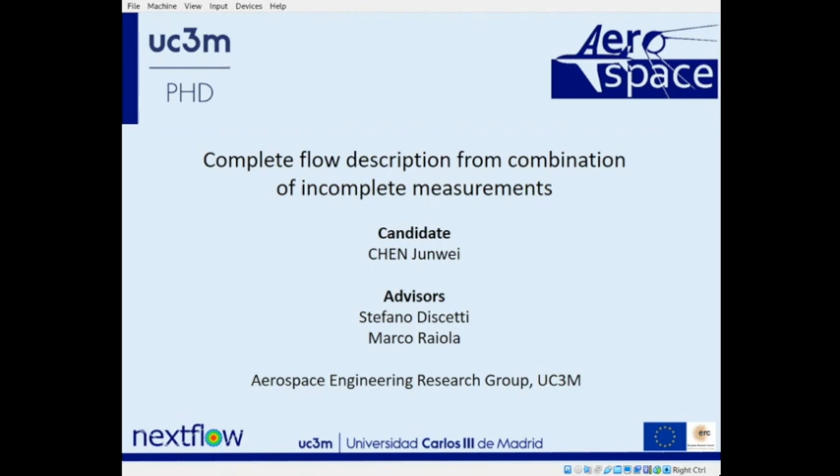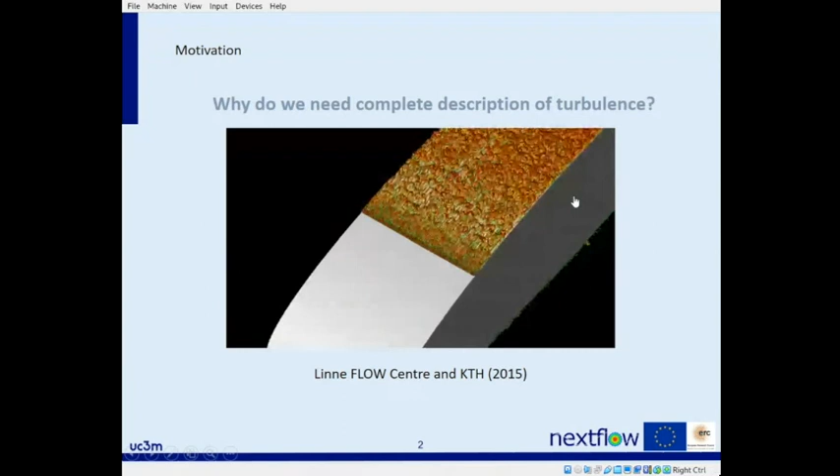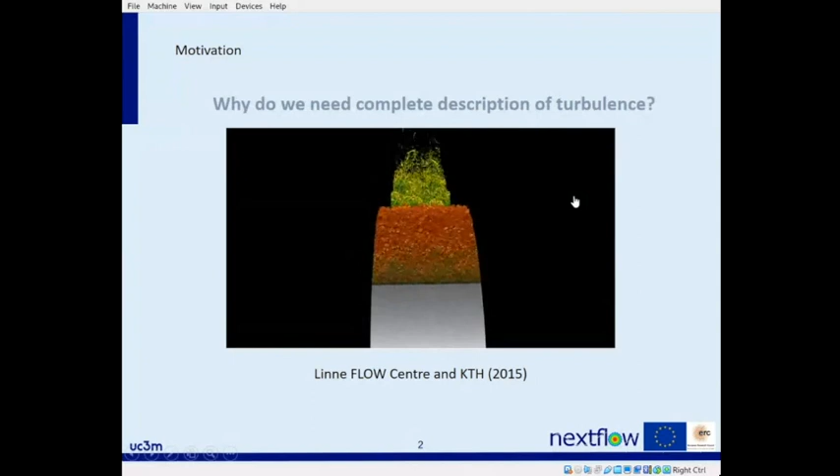Hello, my topic is about data-driven flow measurement, in order to find a complete flow description from the combination of incomplete measurements. Here is a simulation about a wing. You can see there are many 3-dimensional flow structures on the wing. So if we use a point measurement or 2-dimensional measurement on that, we cannot find the full information of the flow field.

Here is a picture about an Asian Indian story. Some people close their eyes to touch an elephant. They may touch its nose and think the elephant is a rope, or they may touch its ear and think the elephant is a fan, but it's not exactly what the elephant is.

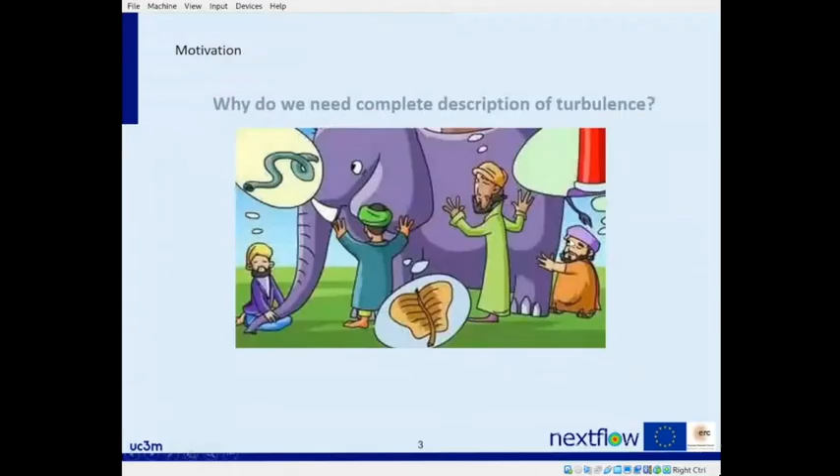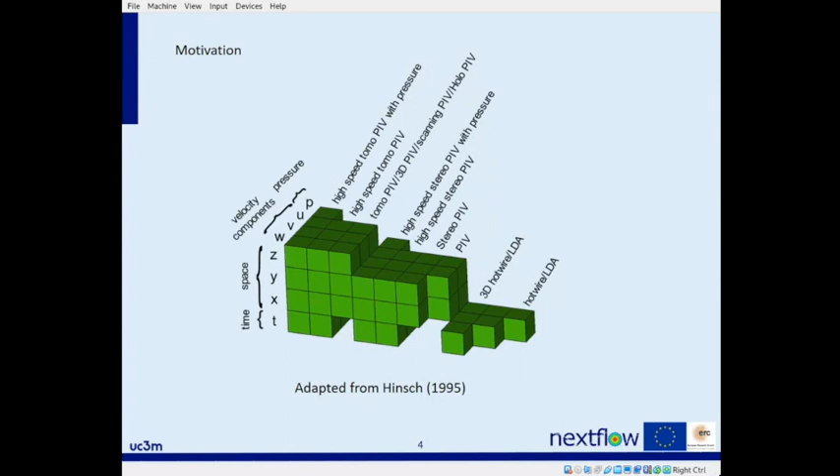And here is a famous picture about the development of flow measurement. We used to have a single point measurement, but there was not much information. With the development of technology, we have more and more dimensions in the measurement and more and more components. With high-speed Tomo PIV to measure the 3-dimensional velocity, we can calculate the pressure from the Navier-Stokes equation. So we have the four-dimensional and 4-component complete description of the flow.

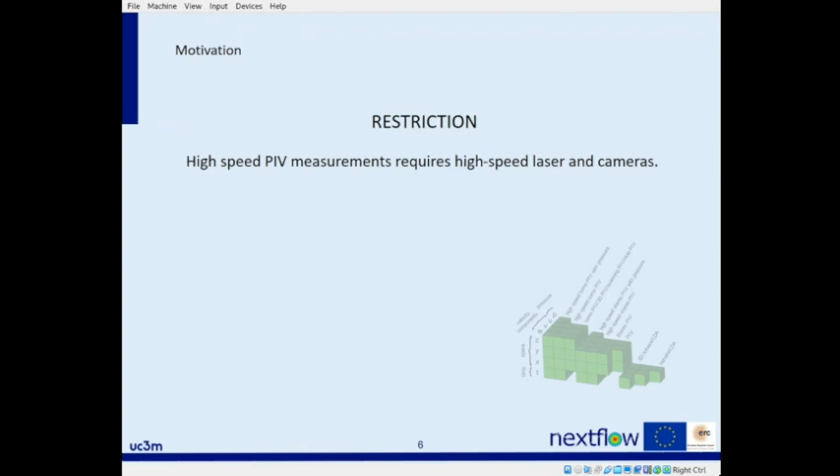But the restriction of high-speed measurement is that we need high-speed lasers and cameras, and there are 2 kinds of laser frequently used in PIV. One is Nd:YAG, another is Nd:YLF. The high-speed laser Nd:YLF has a higher sample rate, but it is expensive, and the average power of Nd:YLF is lower, and they need high-speed cameras, but such cameras are less sensitive, and even with the laser and cameras at the highest speed, they can only measure low speed flows. So there are many shortcomings of direct high-speed PIV.

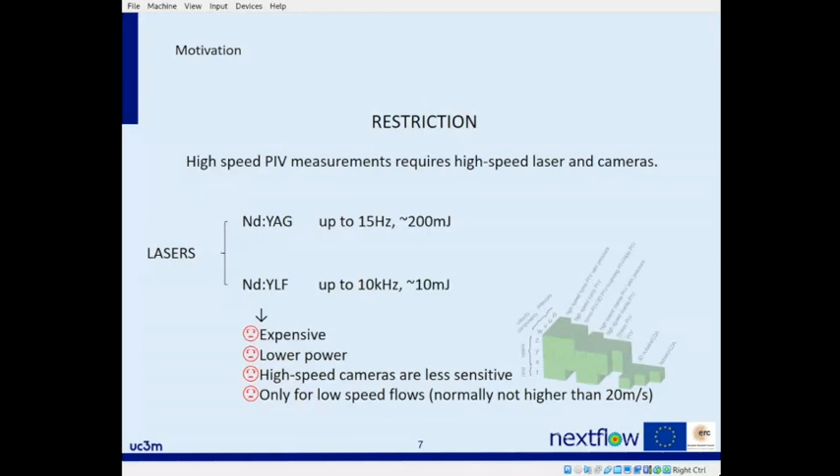For the measurement of pressure, we can use the exact 3D velocity and the Navier-Stokes equation to find the gradient of pressure and integrate it into the real pressure. For lower speed PIV, the time-resolved term of the Navier-Stokes equation is not easy to know. So there are some ways to find it. One is using the continuity equation, so that the time derivative will be removed. But in this method, the time derivative of velocity still needs to be known on the boundary. So we need full boundary conditions.

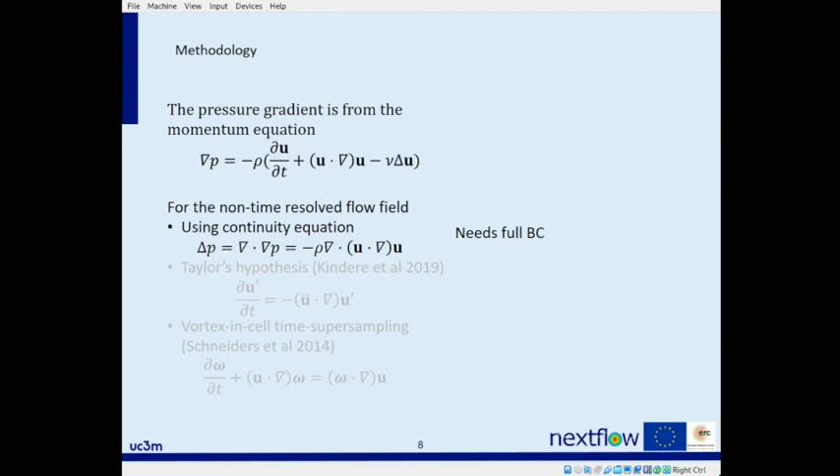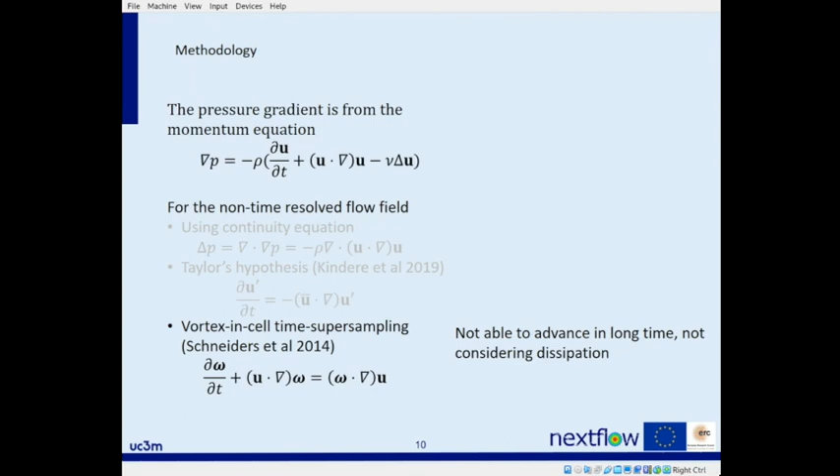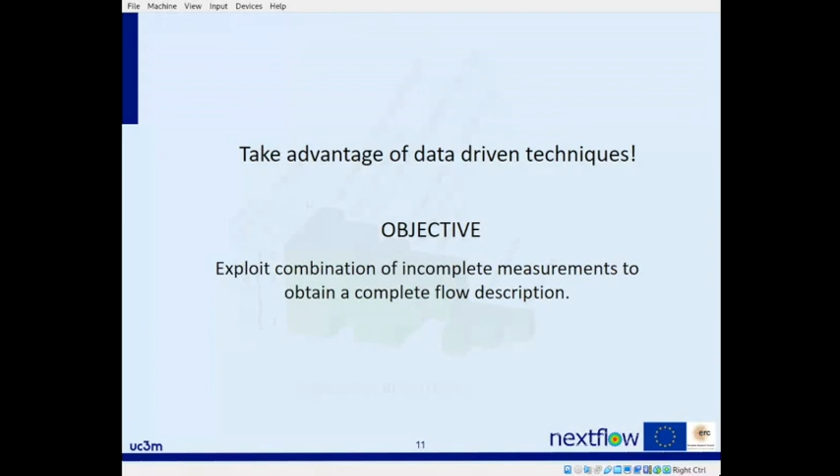Another way is to make use of Taylor's hypothesis, but it cannot endure for a long time. Another way is to use the vortex-in-cell method. However, it is not endurable in time, and it does not consider dissipation. So we want to take advantage of data-driven techniques by exploiting a combination of incomplete measurements to obtain a complete flow description. There are several ways to achieve it, such as EPOD, KNN, and CNN.

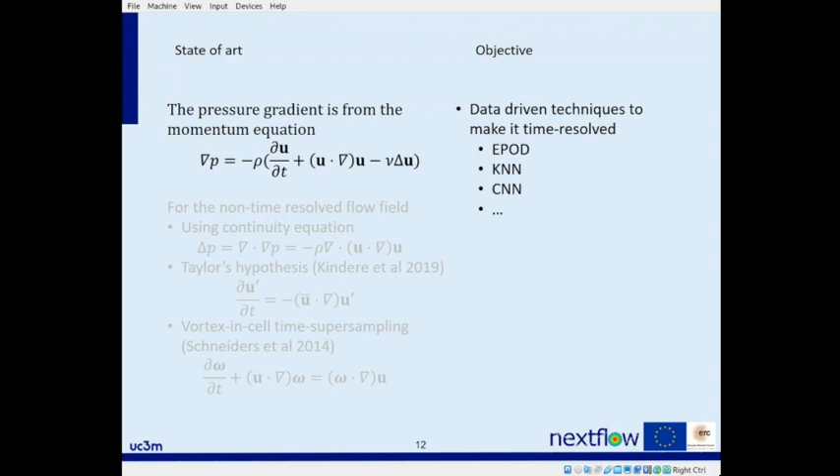Here is the first case we use to validate our method. Here are three fixed cylinders in the flow, and we measure the wake. There are 5 probes here, and the velocity on the probes is also recorded, and we can use the high sample rate probe data and some snapshots to reconstruct the time-resolved flow field, and use the Navier-Stokes equation to calculate the pressure.

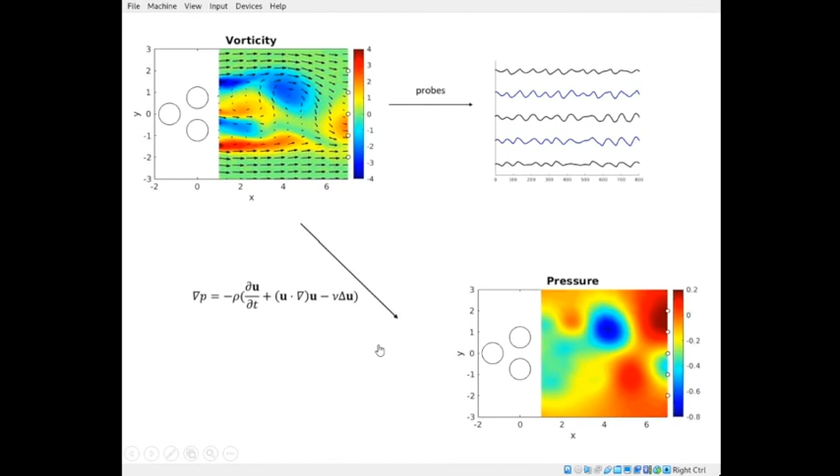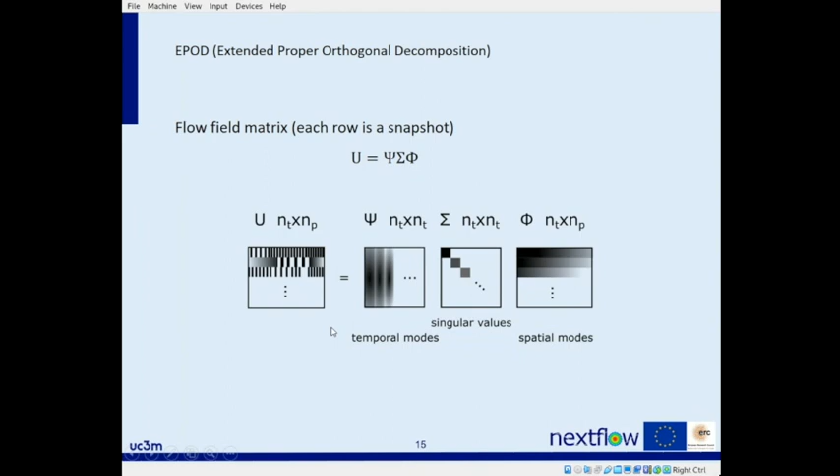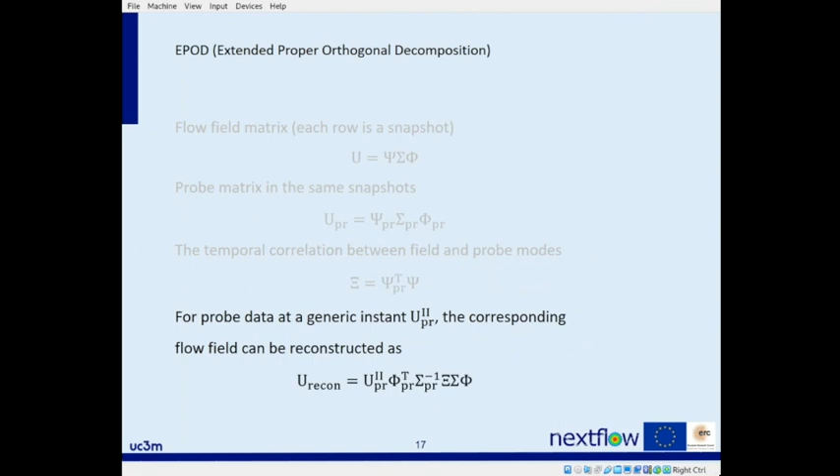Here is the method of EPOD. We use POD, proper orthogonal decomposition, to decompose the flow field into temporal modes, singular values, and spatial modes. For the probe data, we also do it, and we can find the correlation of temporal modes between the fields and probe data. Then we have other time-resolved probe data, so that we can reconstruct a time-resolved flow field.

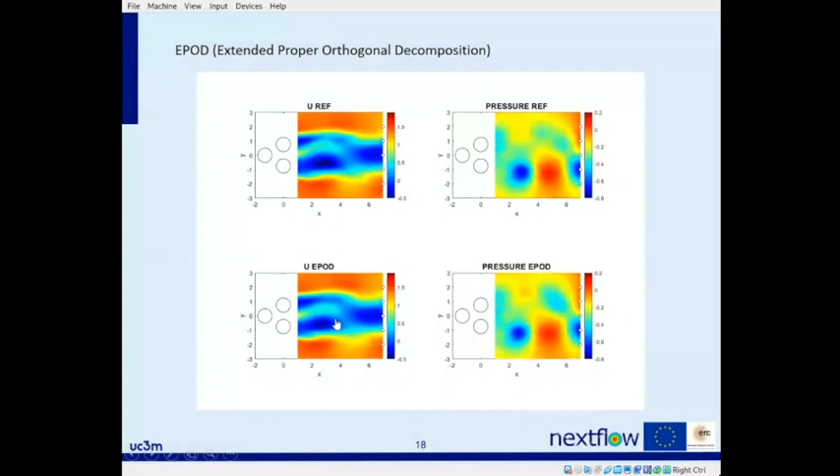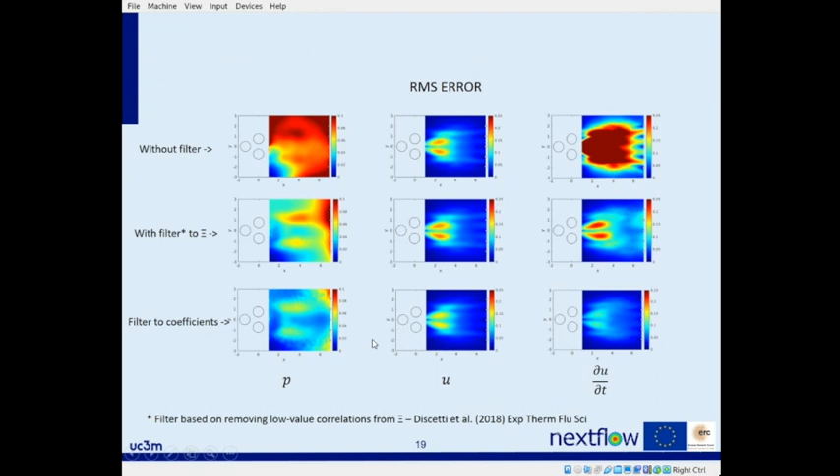And here are some results. The first row is the pressure and the velocity from the simulation, and the second row is the pressure and the velocity we reconstruct using EPOD, and with the proper filter in EPOD, we can get better results. As you can see, without the filter in EPOD, the time derivative of the velocity is not good, so this method gets poor pressure, but with this filter we just found recently, we can get very good results.

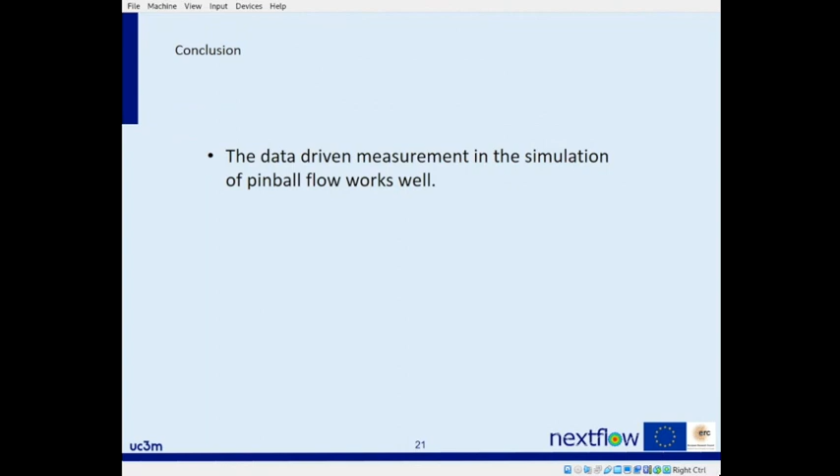And here is the conclusion. The data-driven measurement in the simulation of pinball flow works well, and with the suitable filter, the accuracy of EPOD improved, and we can get very accurate pressure estimation from the new method.

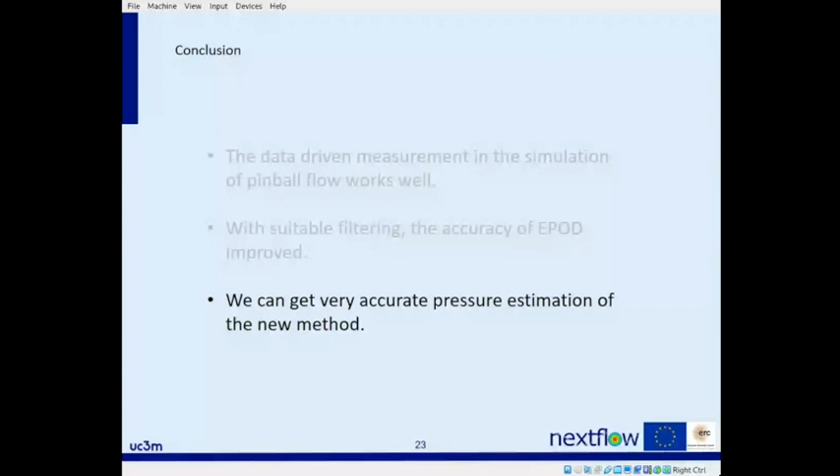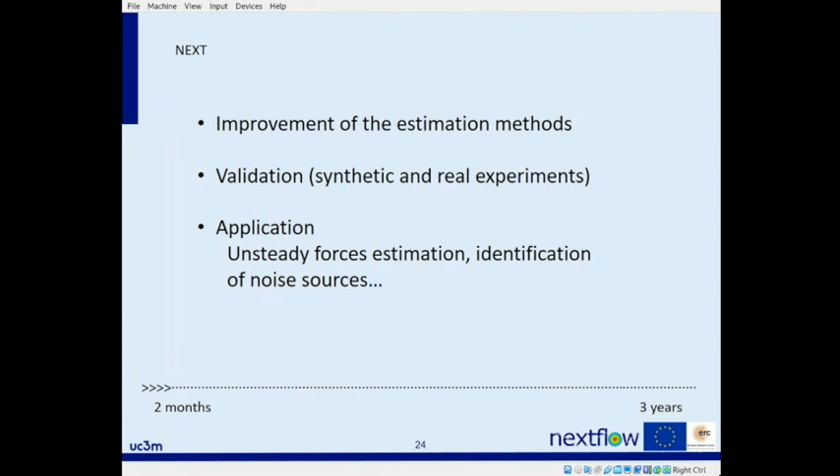What we are doing next is to improve the method and validate it again and again, and then we can find some applications of this method, such as estimating unsteady forces or identifying the noise source. I just started the PhD 2 months ago, so there is a lot of work to do later. And thanks to the European Research Council.